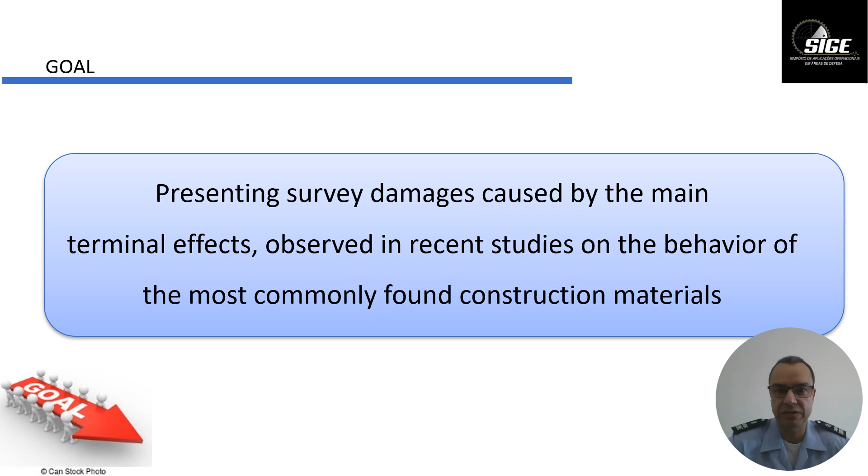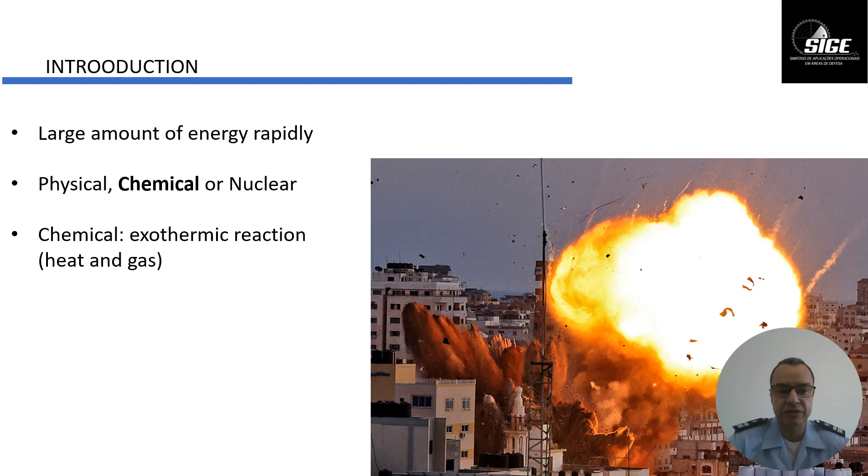In the introduction, we talk about explosions. Explosions are generally large amounts of energy rapidly released after a physical, chemical or nuclear explosion. We're going to talk especially about chemical explosions, because in a chemical explosion we have an exothermic reaction and release of heat and gas that can cause damage and injuries for people close to the explosion point, and the structures around generally have damage after the explosion.

The elevation of the temperature is one characteristic, high temperature around the explosion. The pressure elevation: in this picture you can see the shock wave that is generated after the explosion. High pressure produces a shock wave, and this shock wave brings damage to structures, people, and many things that surround the area of the explosion.

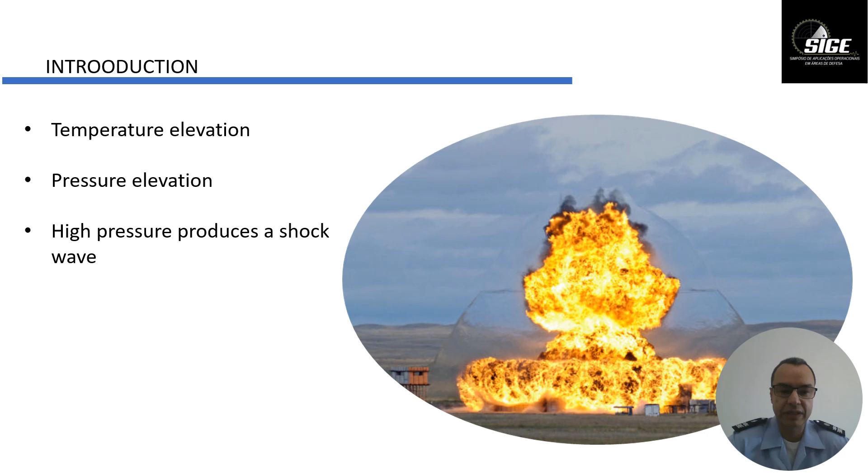Chemical explosives are used in aerial weapons, generally for helicopters and airplanes. Shockwave and fragmentation are the main effects that we find in this kind of weapon. High explosives became primary elements in modern conflicts. After the Second World War, many tests with new materials against explosives were done to study the behavior of structures subject to blast effects from aerial weapons. Verification of a construction's ability to withstand is one of the goals in these papers about explosions.

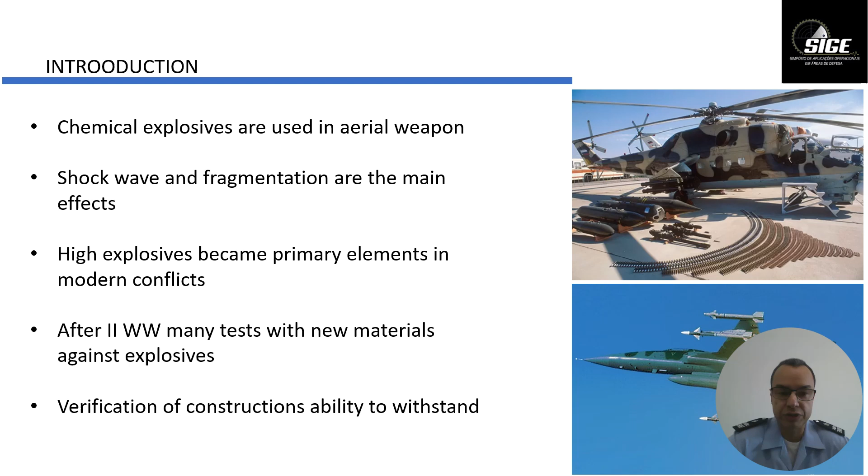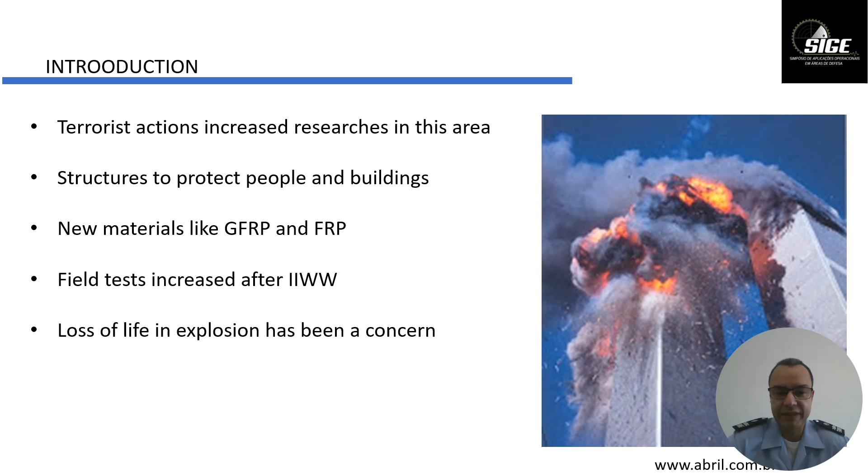Terrorist actions increased research in this area. We can see here a picture of a terrorist action. People are studying structures to protect people and buildings, and new materials like glass fiber reinforced plastic and fiber reinforced plastic are also being tested in field tests with explosives. Field tests increased after the Second World War, and loss of life in explosions has been a concern for everybody studying this area of science.

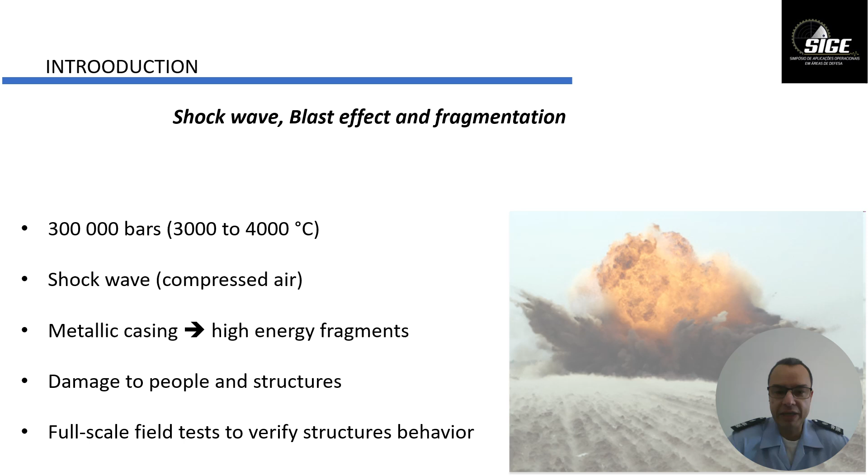Shockwave, blast effect, and fragmentation. About 300,000 bars and 3,000 to 4,000 degrees Celsius are the pressure and temperature you can find in a chemical explosion. The shockwave begins to compress the air surrounding the explosion, and this brings much damage to structures and people. When the explosive has metallic casing, high energy fragments also bring damage to people and structures around the explosive area. Researchers are doing full-scale field tests to verify structural behavior.

Talking about material and methods, the characteristics of the field test: we have to define the concrete compressive strength, the thickness of the slab, and the reinforcement spacing, which influences the reinforcement ratio. The explosive charge weight in TNT must also be defined, as well as standoff distance and scaled distance. Scaled distance is a very important parameter. And the damage observed, the visual analysis. These topics we developed in the material and methods to characterize the field tests we analyze.

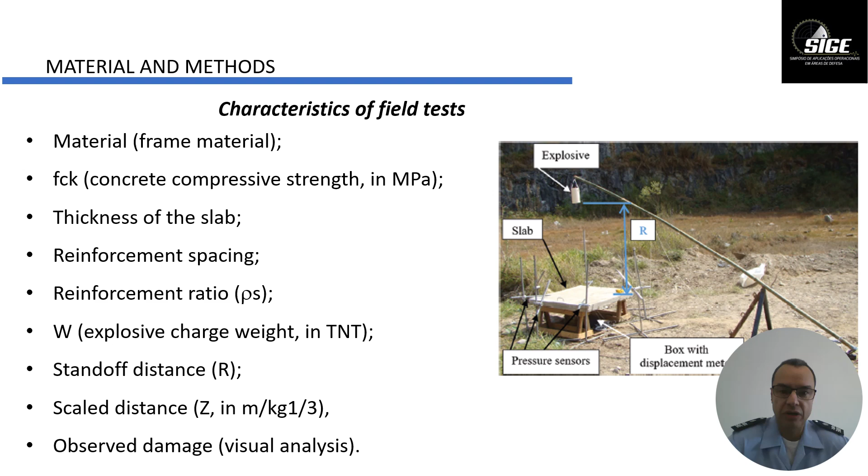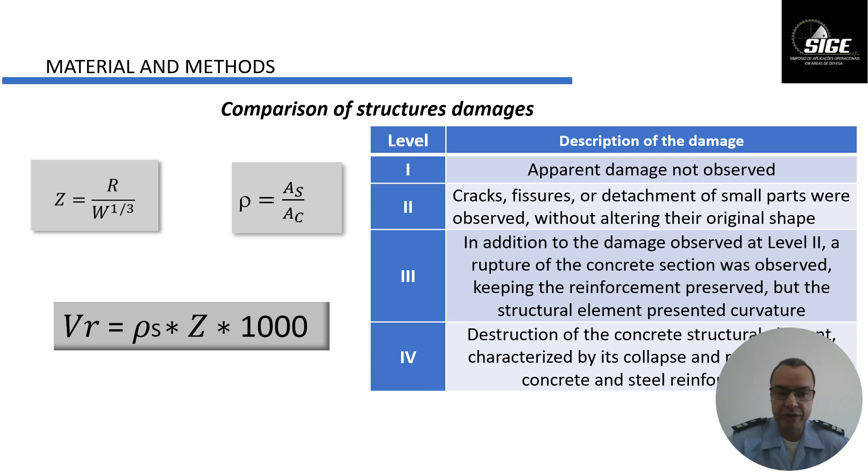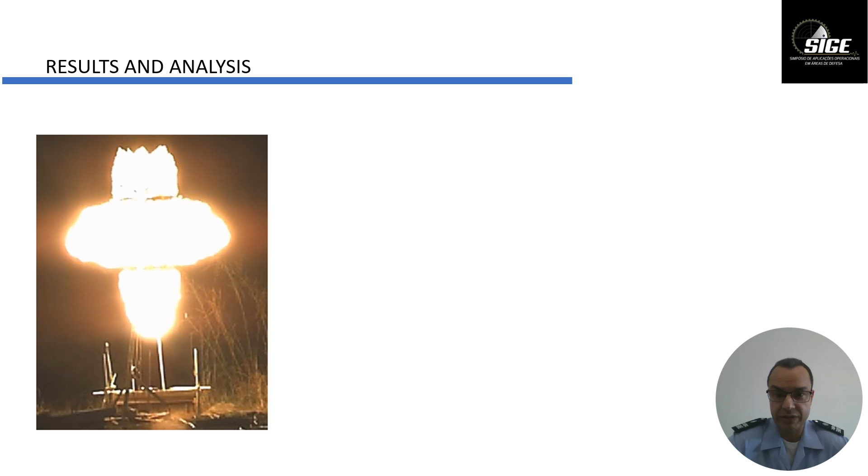So the results and analysis after the explosion. Here we can see one of the explosions of one test that we are going to analyze. We are going to analyze two tests, two different papers, two different works. Here is the first one, and after the explosion we can see that the slab was completely destroyed.

It's level 4. Here we could put the parts again in the original position, and we can see the part where the shock wave shocked against the slab and brought that damage.

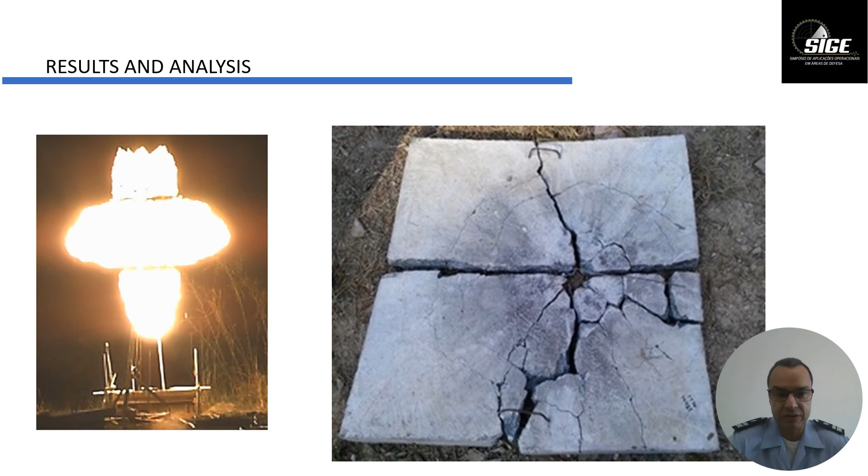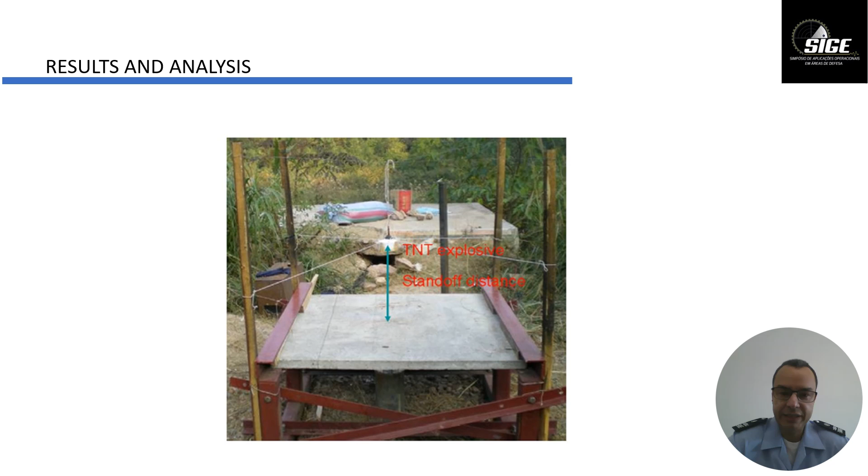Here is the second paper. In the second paper the slab is a little bit thinner than the other one, and here is the position of the TNT with the standoff distance, and here we can see the results. The number of these slabs is the number that we put for the comparison.

Here is slab 10, upper and bottom face, in the first line. We can see on the upper face, where the shock wave shocked against, some cracks similar to the paper we saw in the slide before.

And in the second line, we can see slab 11, the upper and the bottom face, and we could see that the damage was higher. And we're going to see in the table why these damages are different for the same test.

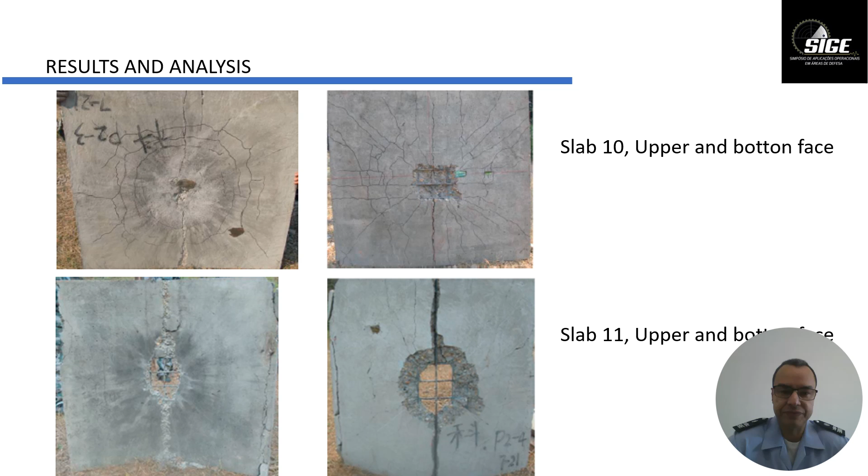Here we can see the numbers of the slabs. We can see slab 10, slab 11, the fck, the compressive strength of the concrete, and the reinforcement ratio. Then we can see the column with the scaled distance, and the last one is the support system for the slab.

Here we can see that slab 1 to slab 7 were just double supported. Slab 8 to slab 11 were double fixed. It's the second experimentation. So we have 1 to 7, the first experimentation, and 8 to 11, the second experimentation. And we're going to see the classification of the damage.

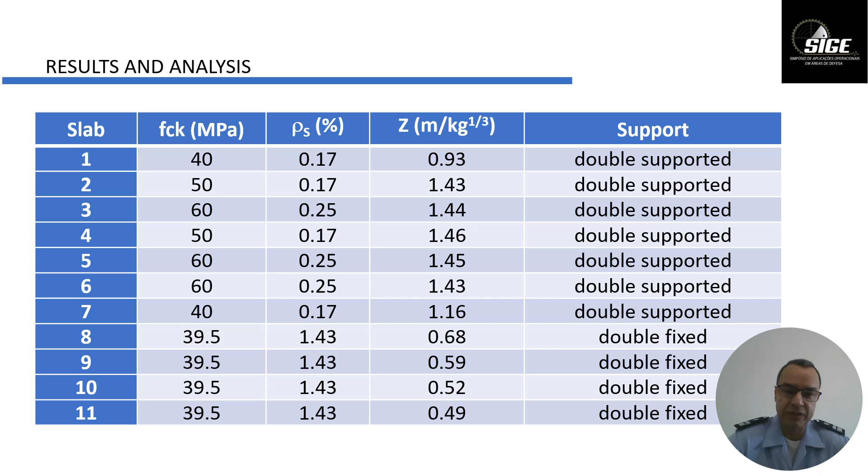You could see that for slab 10 and slab 11, the difference was actually the scaled distance. Slab 11 with a lower scaled distance, and slab 10 with a higher scaled distance. So a higher scaled distance could bring less damage than the lower scaled distance.

Here are the results; we could use the reference value equation. For smaller scaled distance values, slight variation can lead to significantly different damage levels, as evidenced by the tests on slab 8 to slab 11. It was easy to see in the pictures of slab 10 and slab 11. It was a slight variation, and you could see a very different damage.

So in the classification of damage level, we could see damage 2 to damage 3, slab 10 to slab 11. We did the same comparison for the other slabs of the first test, 1 to 7. And working with the equation, we could find the last column of this table and do the classification of the reference value.

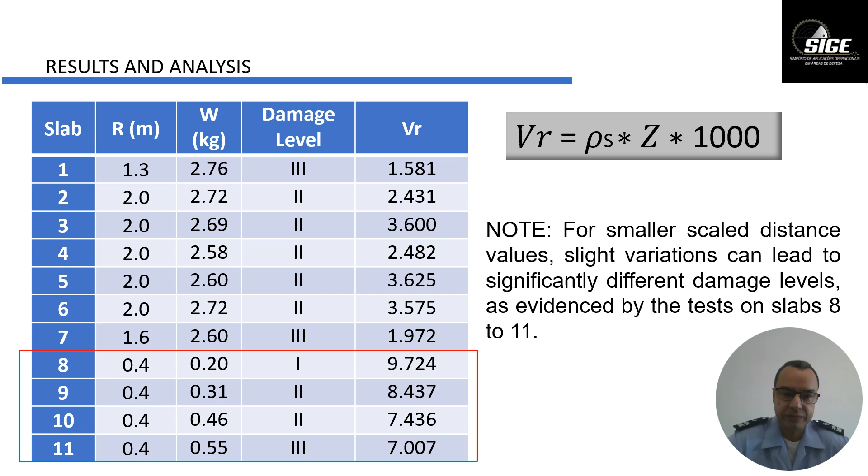What's important in the analysis is that the result of the relationship proposed in the VR equation was consistent only when used in isolation for the same work, when the changes in reinforcement ratio and scaled distance are subtle. Within the same work, the smaller the Z value, the greater the qualitative damage. The damage thresholds can only be applied to experiments with similar boundary conditions.

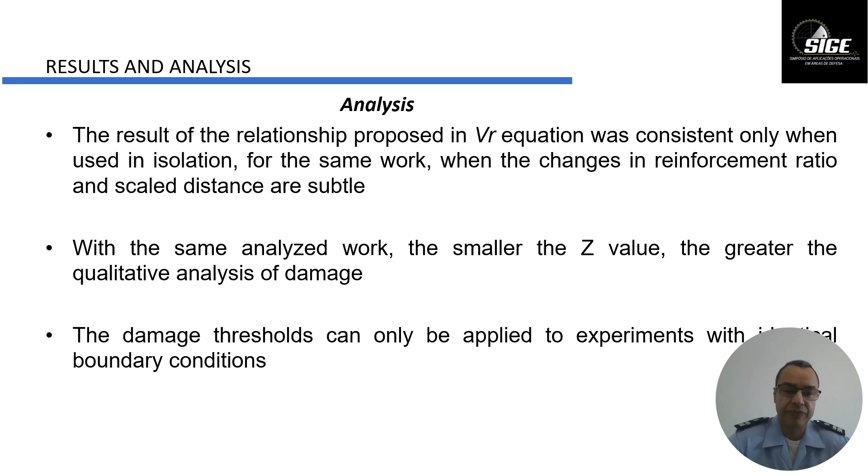So, the experimental conditions vary in terms of concrete compressive strength, reinforcement ratio, cross section, standoff distance, explosive weight, TNT equivalent, and slab support conditions. This variation, when not significant within the same experiment, did not result in abrupt changes in the damage classification according to the proposed scale.

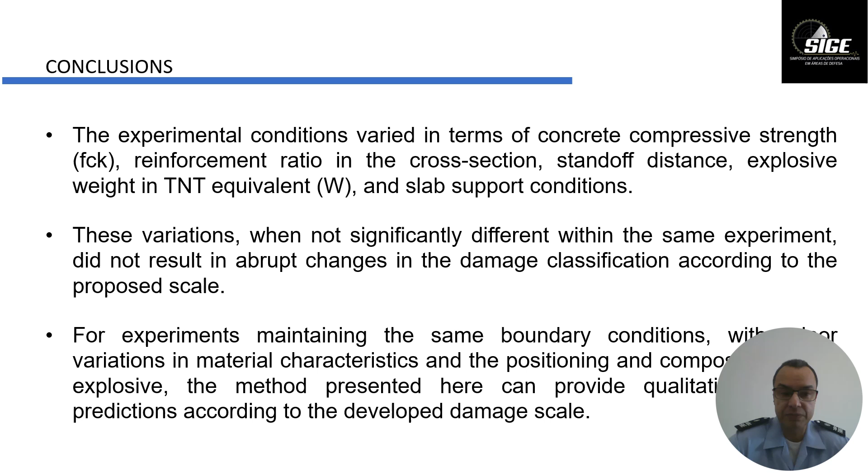For experimentation maintaining the same boundary conditions, with variation in material characteristics and explosive, the method presented here can provide qualitative predictions according to the developed damage scale. So when you use this method for the same experimentation, it works very well. But when you compare different boundary conditions, sometimes the comparison is not so good. So we can use this method for the same boundary conditions.